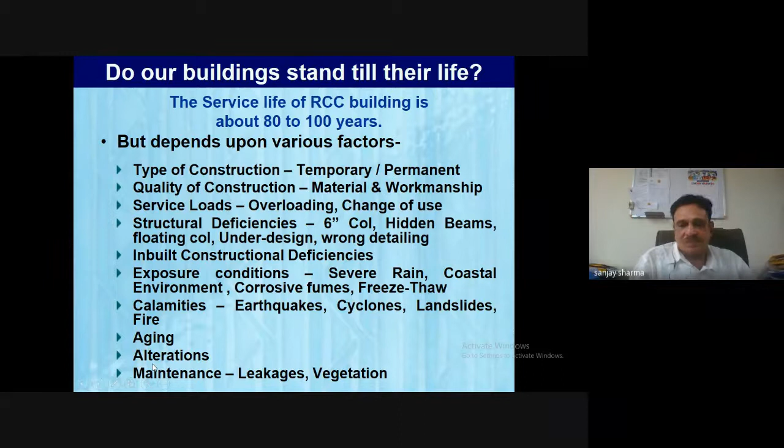So these are the environmental factors, and one of the major reasons for deterioration is the carbon dioxide gas. The corrosion you find in any structure, which ultimately leads to spalling of the cover concrete and loss of strength and loss of area of the reinforcing bar, is due to this carbon dioxide or oxygen ingress.

What happens generally is a phenomenon known as carbonation. This carbon dioxide gas gets mixed with water, and because of the permeability, it penetrates from the atmosphere into your concrete.

As such, carbonation is not a problem to the concrete, but what it does is reduce its pH value. The pH value of concrete, being an alkaline material, is almost near 13, and once it starts reducing due to the formation of carbonic acid—which occurs due to the carbon dioxide gas and the water or moisture present—this carbonic acid lowers the pH value.

As that carbonation migrates from the cover and goes deep into the concrete, it reaches the bar level, and on reaching the bar level it will convert ferrous into ferric, which is nothing but rusting. That rusting will cause debonding of the concrete, and rusting, if it further deteriorates, almost completely eats up the bar also, and the concrete loses its strength and ultimately leads to failure.

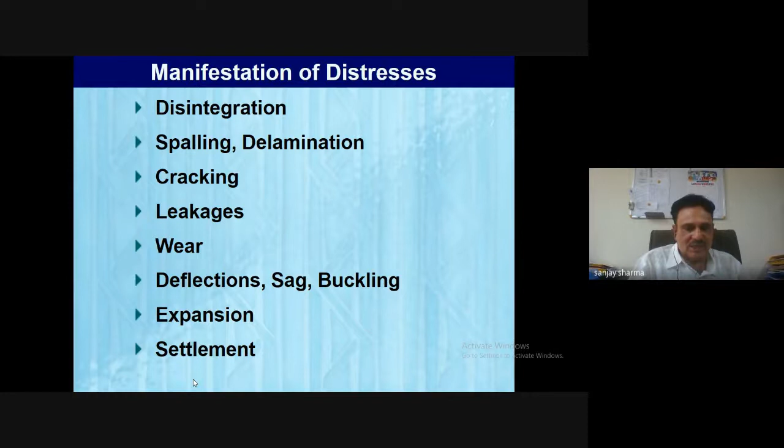We recently carried out investigations on many buildings. A police training center was constructed in Patela, and the building quality was very good, but the issue was that they had not provided proper protection, and during the rainy season water entered into the foundation. Clay being about 1 meter below caused unequal expansion, resulting in lots of cracks in the beams, columns, etc. So we have to think about how to drain out the water.

This shows the importance of investigation and carrying out repairs. Normally, if we are not taking any repair, protection, or investigation measures, the failure cost is very high and occurs much faster. But if we carry out proper repair, proper investigations, and proper preventive measures, we can delay it.

As you understand, cracks can be structural or non-structural. Structural cracks are due to incorrect design, faulty construction, overloading, incorrect detailing, incorrect assessment of bearing capacity, movement or settlement of soil, and corrosion. Non-structural cracks are mainly due to moisture changes, thermal movement, elastic deformations, creep, chemical reaction, foundation movement, and vegetation, etc.

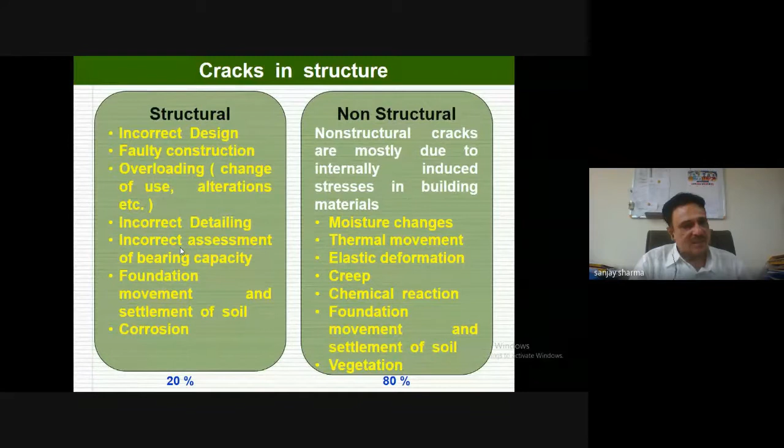That much difference was there, so you can imagine that by understanding the proper type of defects and selecting the right type of NDT test, we can use this approach effectively. We need to understand what type of cracks are there in the slab or any structure, and try to understand whether they are shear cracks, cracks due to deflection, or flexural cracks. Only then can you decide properly what type of testing is okay.

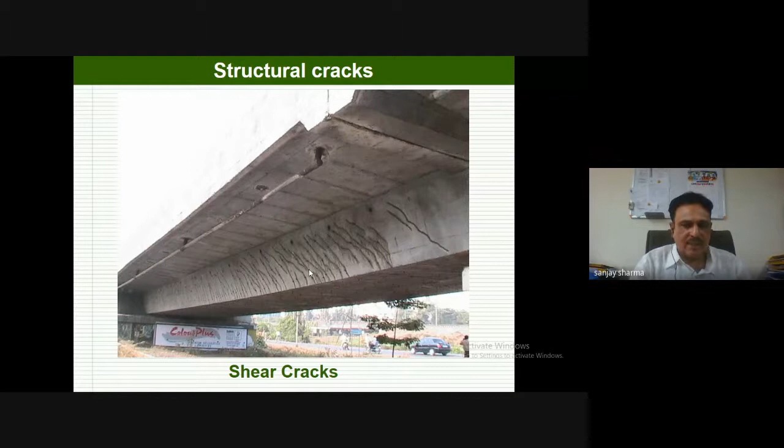If you go to a site and diagonal cracks are there like this, then basically they are shear cracks. So through visual inspection, we try to understand what is the type of defect, so that we are able to decide later on what tests are to be conducted there.

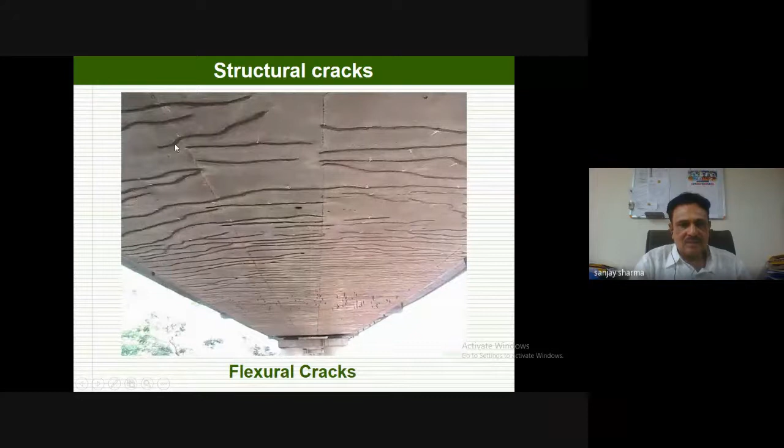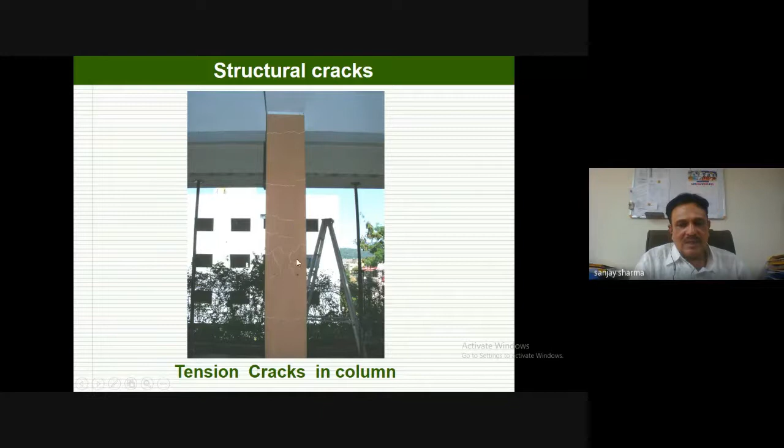This is a flexural failure also. This is again a flexure crack in a slab, a flexure crack in a beam, a flexure crack here, and you can see this flexure crack in a column. This is a tension crack type of thing. So I think you should try to understand the pattern of the crack, and by seeing that pattern, you should be able to tell what is the reason behind that defect.

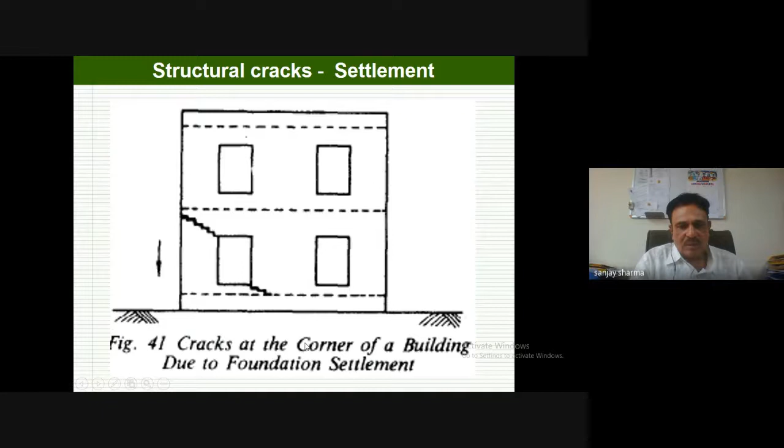You repair to any extent, but generally what they do is whenever a crack appears, they fill it up with cement without bothering whether it will reappear after some time. If not here, it will reappear here or somewhere else. So we need to remove the cause of this settlement. If water is entering, we need to stop the water, or if foundation bearing capacity is not proper, we need to improve the bearing capacity by grouting etc. We need to understand the issue and take proper measures. These are all the patterns of settlement cracks.

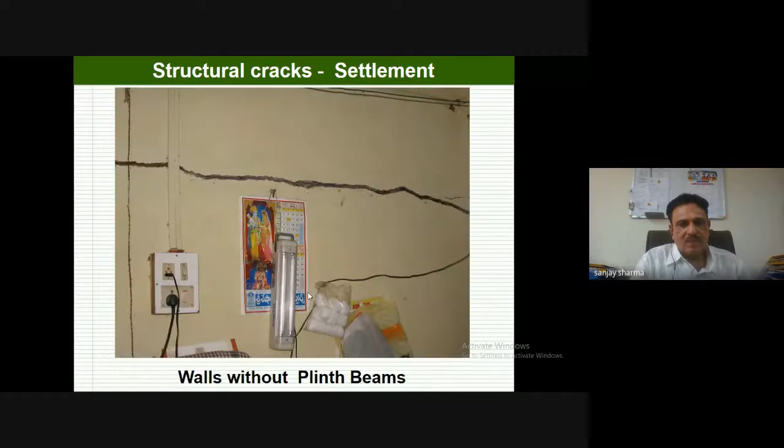This is the wall without plinth beams. This is again the external ground settling down. This particular ground is settling down, and a big gap has appeared between this plinth protection and the building foundation. Water enters here also. This is what you can say is external ground settlement. Complete settlement has taken place, and cracks will appear whatever the structure may be.

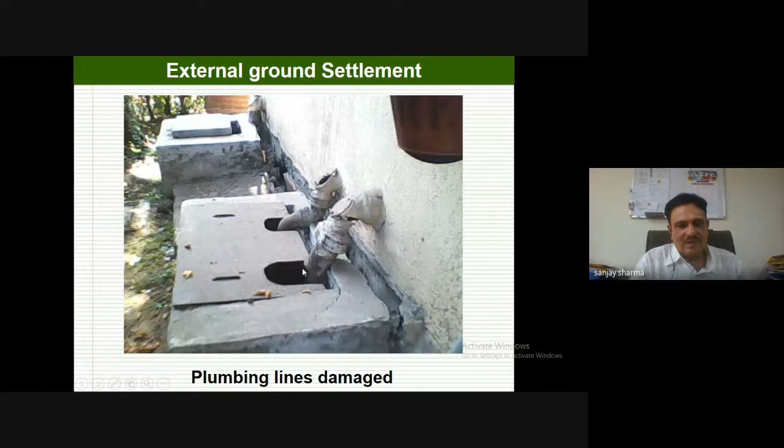This is plumbing line damage. Again, in one of the buildings, what we found is that the traps which were provided at the bottom had settled down. All the plumbing was settling down. So from there we could understand that there is a foundation settlement in that particular building.

Corrosion is one of the bigger phenomena, and it occurs due to two reasons. One I have already explained is carbonation, and the other is chloride. The difference between carbonation and chloride corrosion is that carbonation corrosion cracks will appear along the bar and grow parallel to that bar. Whereas in this case, you can see corrosion has occurred and spalling has taken place, with the crack appearing along the bar.

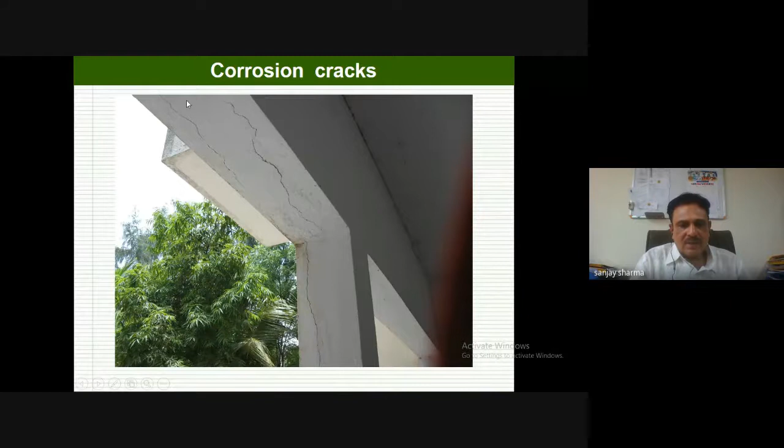This is what you can see, the bar is going here, and the crack is going along the bar. Again, this particular spalling has taken place along these bars.

But in the case of corrosion due to chlorides, what happens is chlorides are already there inside the concrete. This lowers the pH value, and when it reaches the bar, there will not be any sort of crack appearing on the surface, and the failure will be sudden. Because when debonding takes place between the cover concrete and the reinforcing bar, the cover concrete will fall out immediately. There will be small corrosion spots on the surface, but otherwise you will not see anything wrong. So basically, corrosion due to chloride is sudden.

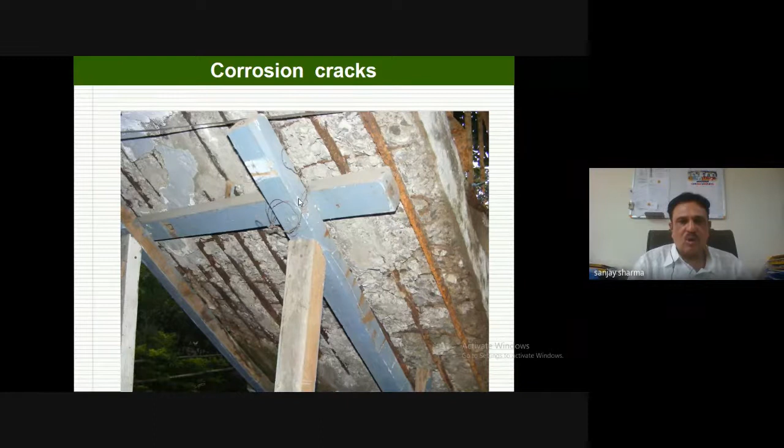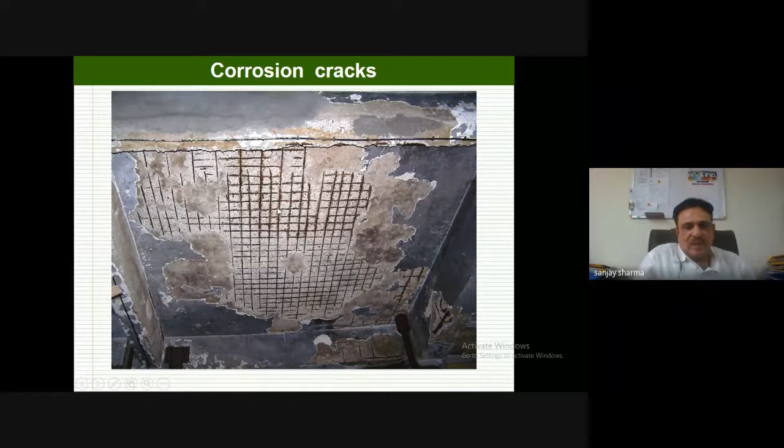As you can see, this is corrosion due to chloride. The whole slab cover concrete has come down, and the area of the section has almost reduced to zero. So we need to know the extent of corrosion, and for that we have corrosion tests available - the corrosion meter, resistivity meter, and other corrosion tests. With the help of this corrosion analysis, you can find out the extent of corrosion, whether the bars have reduced by almost 100%, 50%, or 30%. With the values obtained from the corrosion test, we can determine this.

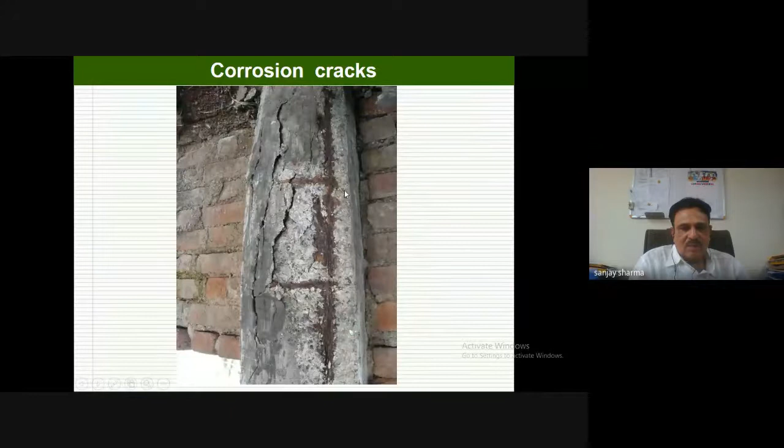This is again corrosion cracks, very bad - almost complete loss of strength in the bar area. You can see how the section has got affected, particularly at the bottom. This is an abandoned building, very badly affected, so it has collapsed. This again shows corrosion along the bar.

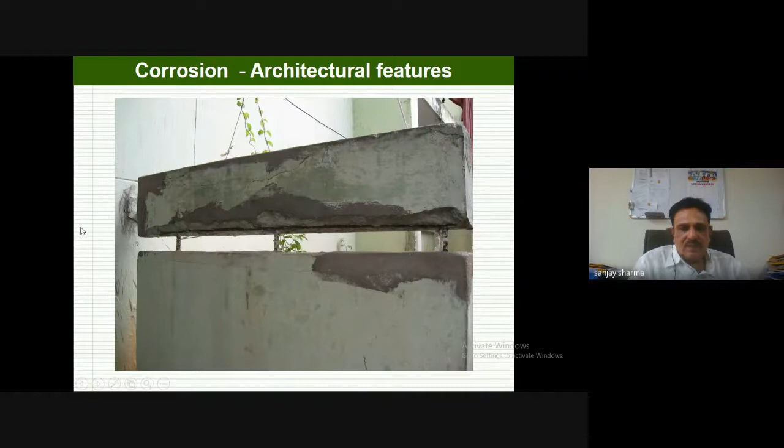Thin members, basically non-structural members, are generally made of M20 grade concrete. If you could make the concrete almost impermeable, the ingress of moisture would not occur, but that is not possible. That is why sometimes we are using a lot of these coatings nowadays - special coatings which we call anti-corrosive coatings.

Anti-corrosive, anti-carbonation coatings. If you provide them on the surface, they do not allow moisture and carbon dioxide to enter and protect your concrete surface.

When deciding this issue, we need to understand to what extent this carbonation has taken place. We take a core, and if it has not reached up to the cover level, we can provide coating on the surface. But if it has reached the cover level, then the repair will be different. That is why investigation plays a very important role in deciding the repair and rehabilitation of the structure.

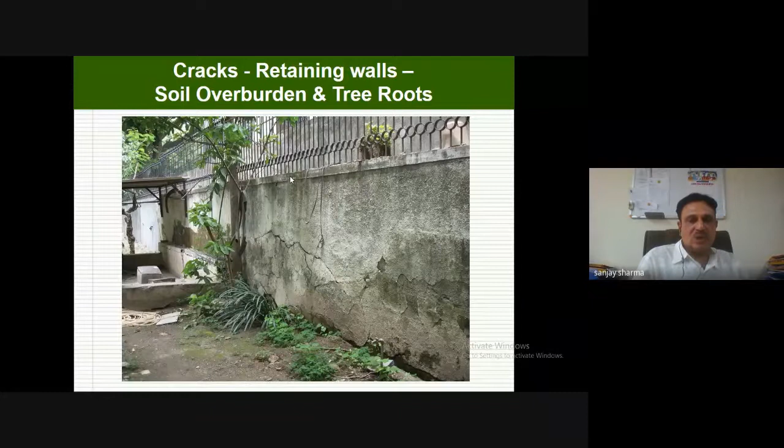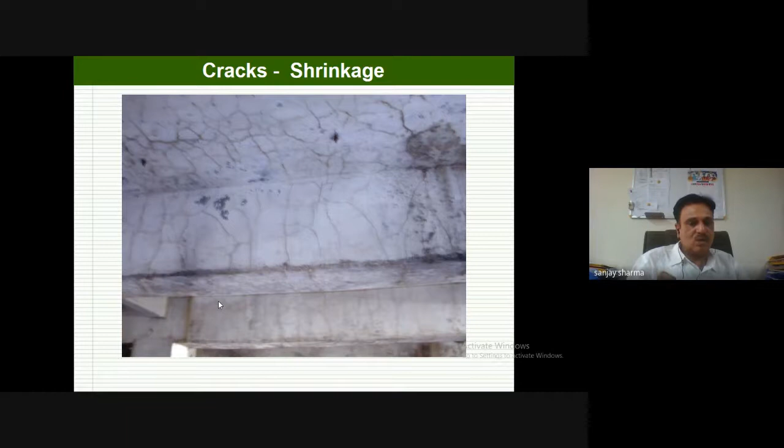Whenever anybody comes to us with a problem, we say visual inspection is very important first. Visual inspection is always a part of NDT technique, and here you need to know this is a ground level water tank.

Again, you can see complete tone change. This is again due to chloride, because there were a lot of chlorides in the water, and basically it caused this sort of problem in the structure.

Almost gone. This is the sulfate attack, particularly in locations like Punjab, Bathinda area. Ground salts are present there, causing a lot of problems.

I have seen almost newly constructed buildings where people are not taking the special precautions needed. The sand they are using also contains a lot of deleterious material, including chlorides and sulfates, and once this enters, many important structures, even military structures in areas like Ganganagar and other belts, have been affected by this corrosion.

This is one of the tanks we tested. I think you can very well imagine the construction quality from this example. There were two water tanks, Intze type overhead tanks, constructed in the same year by the same contractor using the same material.

One tank was standing in absolutely very good condition. The other tank had deteriorated very badly, as you are seeing here. Once they wanted this investigated, we used NDT techniques including rebound hammer, ultrasonic pulse velocity, and carbonation testing on that particular structure.

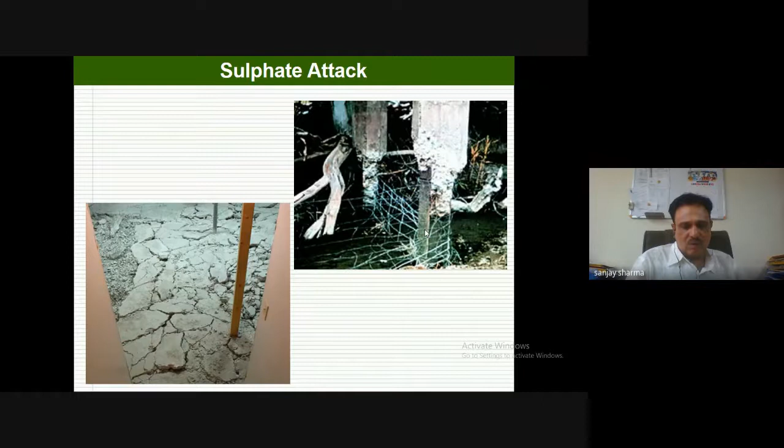This is the sulphate attack again, showing how this is eating into the concrete.

Alkali aggregate reaction: if the aggregates have deleterious material and we have not used the proper mix, this type of cracks will appear. Again, the pattern of the crack is telling you what is the cause behind this particular problem.

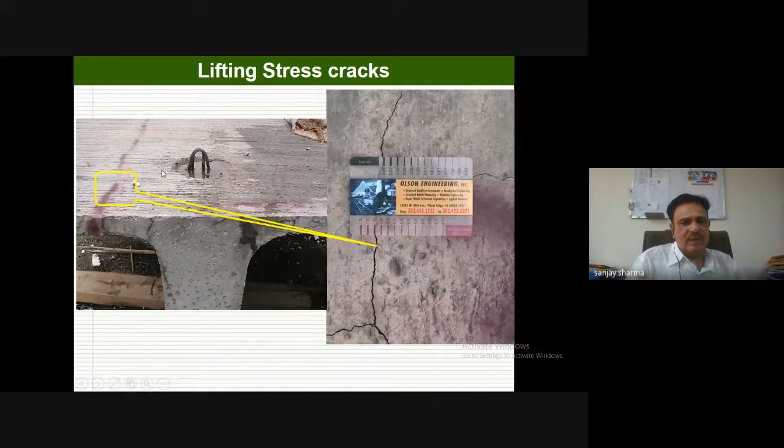Here you can see lifting stress cracks. Basically, during the lifting of that particular precast member, this particular area was affected.

This is again, I think, one of the very major issues. Generally, we don't remove the peepal tree because of our religious sentiments, and you can see these trees grow their roots inside, causing the concrete to disintegrate. Then penetration of moisture takes place, and that is what happens. You also need to see proper maintenance of the roofs.

One of the structures in Chandigarh was a very important training institute where we tested and found big workshops. There, folded plate type roofs were provided. In folded plate type, you have the angular section, then a channel is there.

What happened in that particular folded plate roof structure was that it was mainly workshops, and they were not removing leaves because the height was too much - it was an extraordinarily high workshop building, and there were lots of trees along that building. So all the leaves used to collect on the channel of that folded plate roof, and during the rain, it used to block the rainwater pipes. Once the rainwater pipe is blocked, water was not draining out and remained stagnant. So any water on the rooftop, due to gravity, will penetrate into the slab.

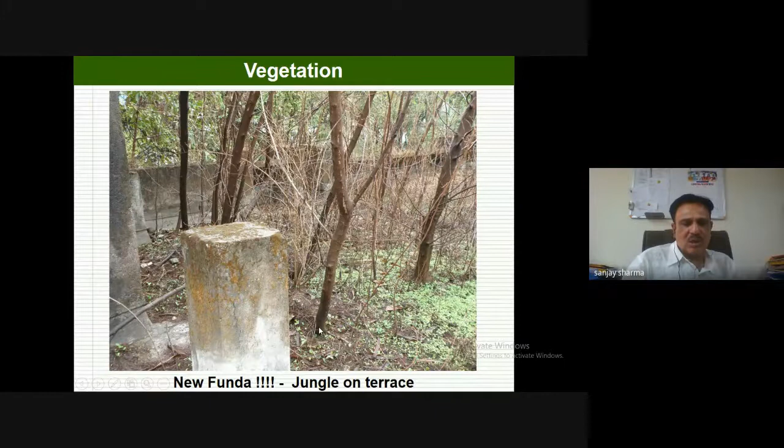So we generally don't take care of that. But once it is allowed, rehabilitation becomes one of the major problems, because it causes loss of strength of structural members, and maybe corrosion also, so all those things need to be investigated.

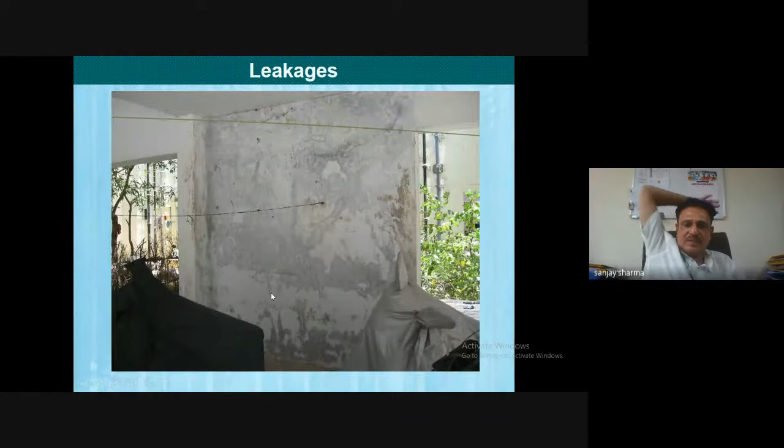These are the leakages. Again, most of the defects in our RC structures are due to the ingress of moisture or leakages from some place. This particular leakage is, I think, responsible for 80% of the problems in our structures due to moisture ingress, as you can see. A very common sight, particularly in wash areas, bathroom areas, toilet areas, is one of the major issues. We need to know what the moisture content is, how much moisture, whether there are still leakages or not - only then can you take remedial measures.

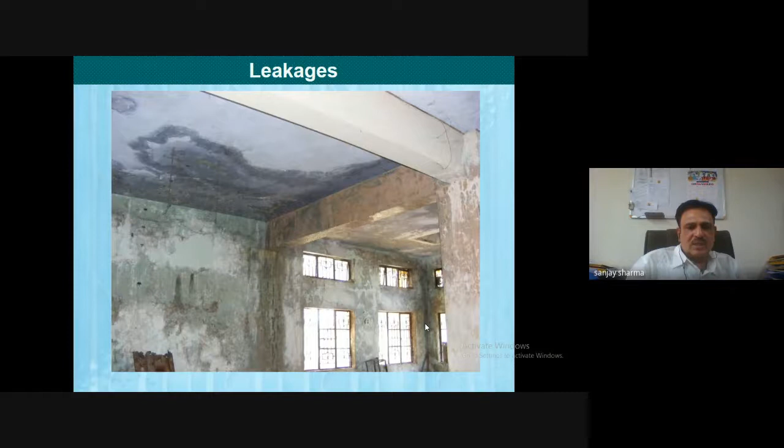If you take any cosmetic remedial measure, it will not be effective at all afterwards. As you can see, this is a very common sight in most structures. If you go to any structure, any place, this is what happens - leakages. This is poor waterproofing.

In our own structures, our houses and other buildings were constructed in the 70s. So when we got into the 2000s and all that, the waterproofing technique here was mud fuska - like bitumen coating on the mother slab, mud fuska, and then tile terracing. These tile terracing joints were there, and because of ants and such, most of the joints got damaged, and water started entering, causing leakage.

So what we did is we thought we'll remove that particular affected portion only, remove even the mud fuska if it's not proper, and relay the tiling. But when it was done, instead of making a very thin joint, we recommended almost a 1 inch joint. We thought we'd fill it with waterproofing cement mortar, and if any problem arose, it would be easy to repair afterwards.

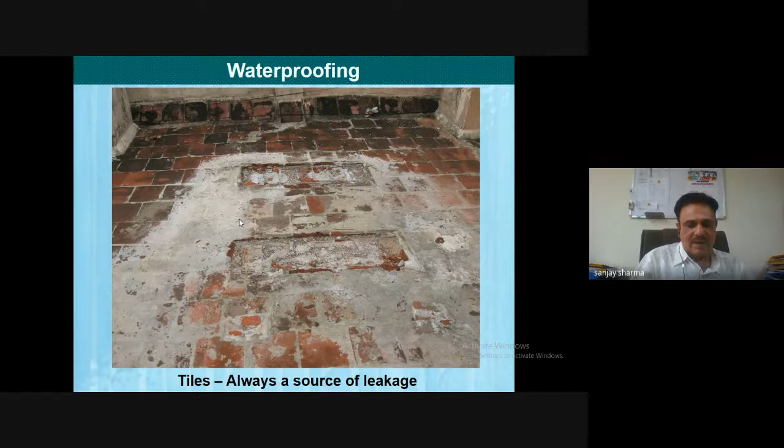That was done in 2000, and now it is 2020 — not a single case of leakage has occurred since. So correctly identifying the problem is very important in any repair or rehabilitation work.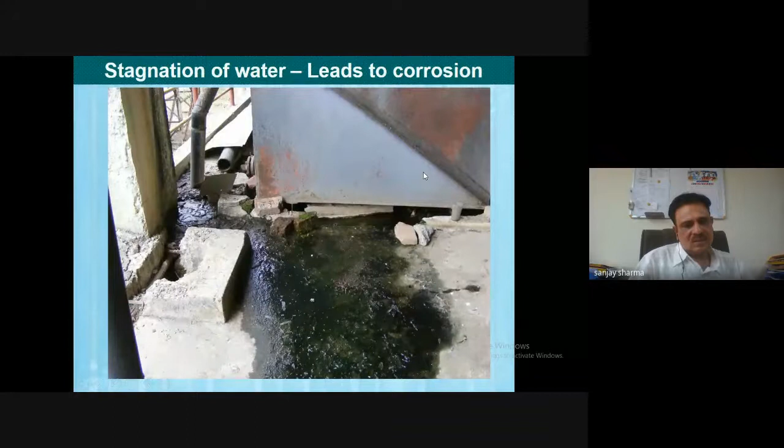This again shows what generally we do — leakage from the tank at the bottom, stagnation of water. Many times, in structural buildings, other causes of distress or cracks may be vibrations from pumps, buildings adjoining rail tracks, buildings near rock mines or blasting areas, close vicinity to unsafe structures, possibility of pounding or joining of buildings during earthquakes. These factors are again one of the major problems.

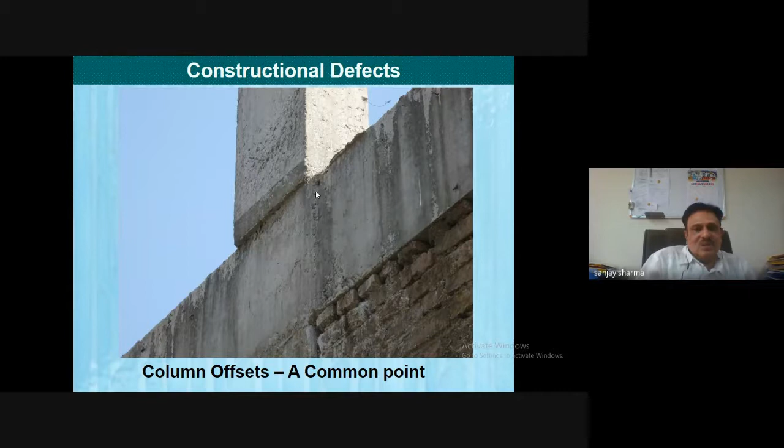This is a type of building we tested — a 12-story building. When the contractor laid the foundation and the plinth beam, he found he had not provided the exact size and distance for it. So he took out the column, provided an offset, bent the reinforcement, and put an offset into the building. When this came to notice, it was clear it had not been done properly, and a lot of issues occurred because of that. This shows generally how the construction was carried out.

This particular case involved almost 12 stories being built, with a dispute over the grade of concrete used. It was whether it should be M20 — because the drawing stated as per IS 456, M20 minimum grade of concrete, but the other specification stated M15 grade of concrete. There was a dispute over this. The whole building was constructed this way, and when we were carrying out our inspection, this issue came to light; otherwise nobody would have noticed it.

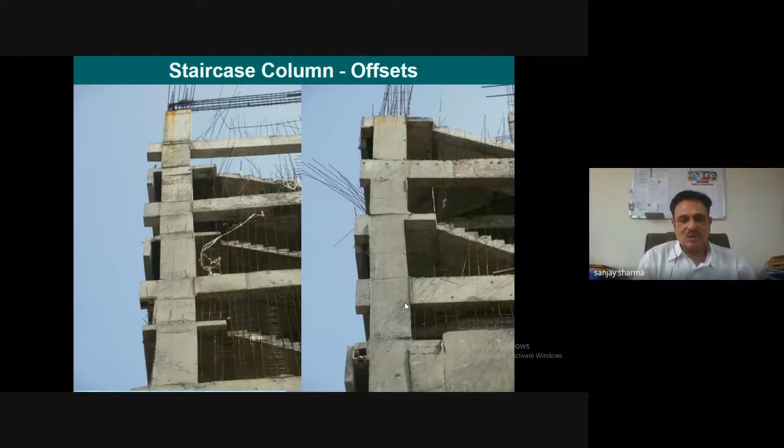So this is how we generally find that construction defects are one of the very common causes of such problems. We can use ultrasonic pulse velocity, the UPV test, to find out the depth and extent of the crack in a particular building.

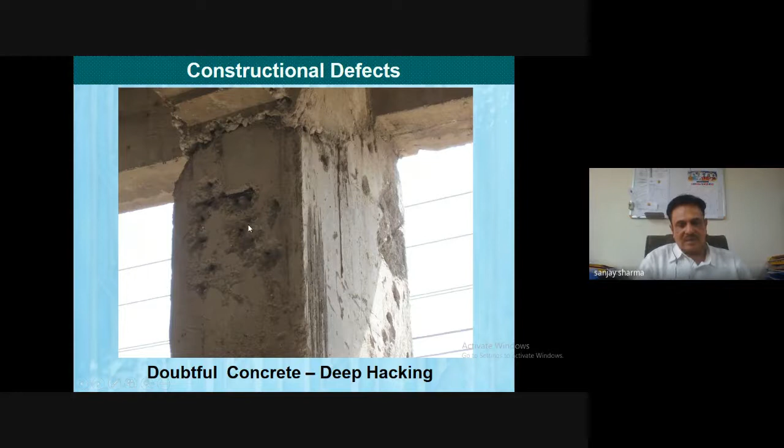You see, cold joint. This is what honeycombed concrete, not properly done. We can find out the quality of the concrete by using ultrasonic pulse velocity test. Leaching of the concrete due to water, and again the porous concrete is there.

Many times, additions or alterations are to be identified at the site by carrying out visual inspection, and we have to see what modifications have been made, if any part has been removed, or if any extension has been done, whether proper rebars or dowels were provided or not.

One of the buildings we also investigated in Chandigarh was a 2-story building, which was otherwise designed as a 7-story structure, but was built as 2-story about 30 years back. Now they didn't have any drawings available, nothing about what bars, type of bars, type of foundations, or grade of concrete were used.

So there also we carried out investigation using a Rebound hammer and then a ferro scanner, by which we found out the number of bars, the dia of the bars, and the cover to concrete. Then core cutting was utilized on the RCC raft foundation, and we took out the depth of the raft.

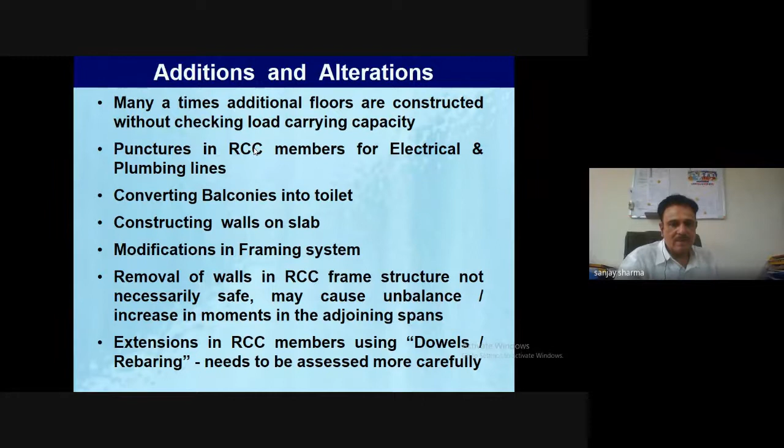So alterations and additions are carried out without proper care. This is a wall that has been added without checking whether it's below the beam, whether it is allowed or not. But yes, they wanted a partition, so a wall was just constructed.

Such cutouts are always made. This is a hole, punching of the RC member for some purpose.

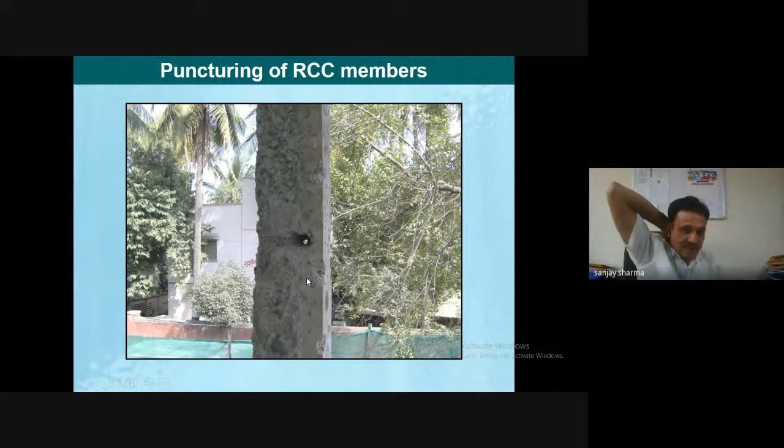One of the structures, a mandi structure in Chandigarh, collapsed because a person who was an artist tried to fix a letterbox on a particular column. It was so weak that while he was hanging something and drilling, it was an outer column, so once it collapsed, the whole building and whole slab collapsed.

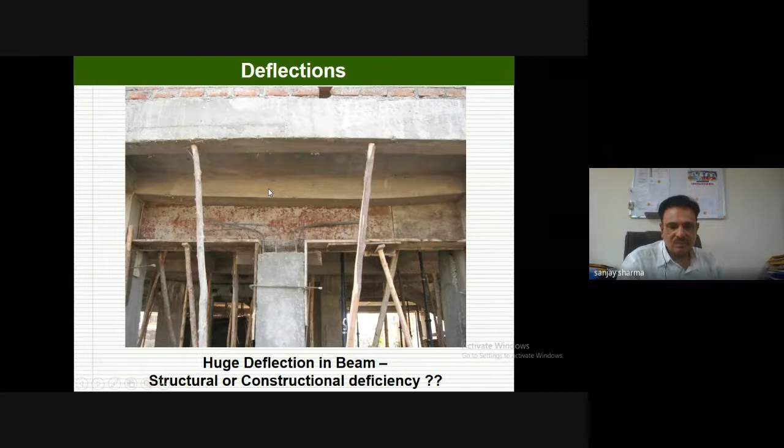That is the example of flat slab I was giving. Flat slabs tend to deflect more if not properly done, properly designed, and that is what causes a lot of this loss.

Then many times, what are the assumptions? We need to see that also. Plaster generally is 12mm, but we go up to 20 or more. External plaster 20, we go up to 50. Ceiling plaster again we provide more. So this all adds extra dead load, and generally it is not accounted for in design, which leads to problems.

Then large span slab ratio. One of the buildings we tested in Leh had a very unique issue. In normal walking there was no problem, but it was a defense building, a seminar hall.

When senior officers were coming, junior officers were giving a salute by hitting the ground, stomping their feet hard on the ground.

The vibrations could be felt by a person sitting on the other end of the court. So they said, okay, let us see what we can do.

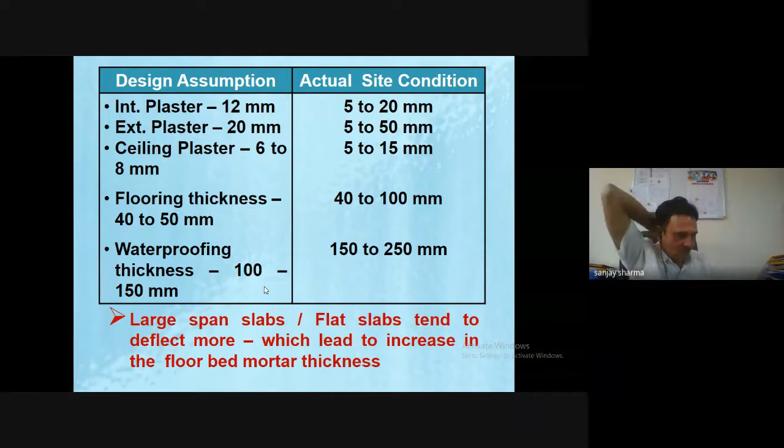So we investigated again, starting with concrete quality and concrete strength, and ultimately what we found was quality and strength were okay. So then we asked them to check the design.

So we checked the design and found out that as per deflection criteria, the slab was failing. The difference was only this: the overall thickness provided was 150 mm, whereas the effective depth was to be 150. So it was not causing any cracks, just a very marginal difference.

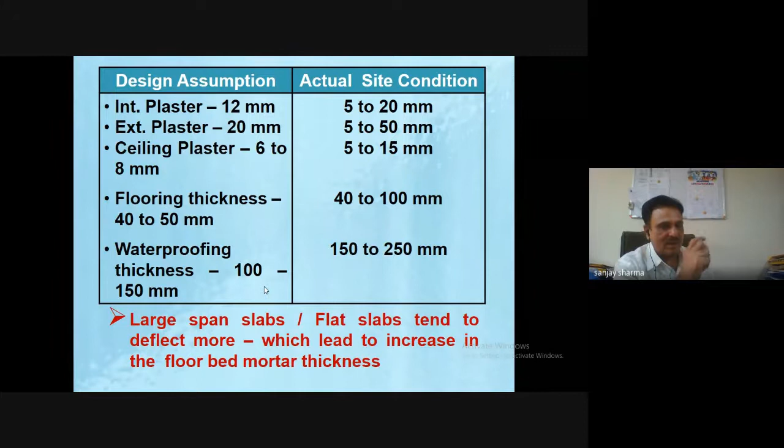So basically moving around was not causing it, but when you were hitting the floor hard, it was setting off the vibration and causing the deflection, etc. This is generally what we do.

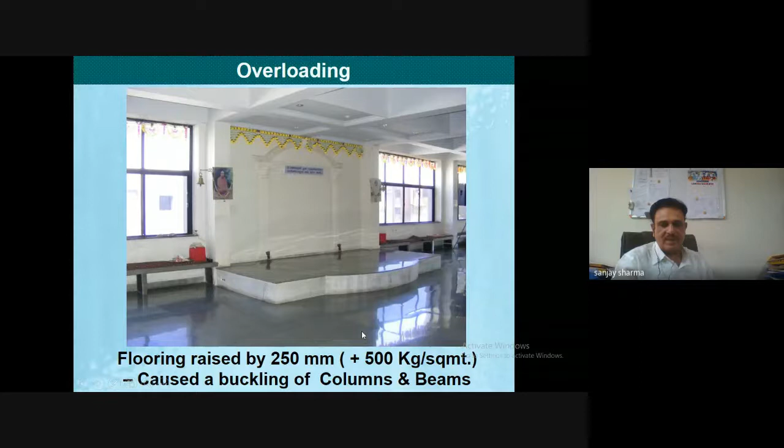Also, if any extra load has been added, we need to be careful while carrying out any condition assessment.

This is again an example, of an IDA building. IDA had this building in Chandigarh, about a 3-4 story building, which was an office building, but they converted it into a storage building.

What they did was put up racks, and on those racks they were storing all the forms and files that they collected. So basically, the building was not designed to take this extra load.

So what happened? It caused the column to collapse. The building wasn't completely damaged, but the column collapsed and so on.

But they carried out the repair without putting any extra reinforcement. They put the load again, and it collapsed again. So then they came to us, we carried out testing, provided the proper design, and then it was rehabilitated.

What we used was the present concrete strength, what reinforcement bars had been provided, and whether some cracks were there or not. Accordingly, it was rehabilitated.

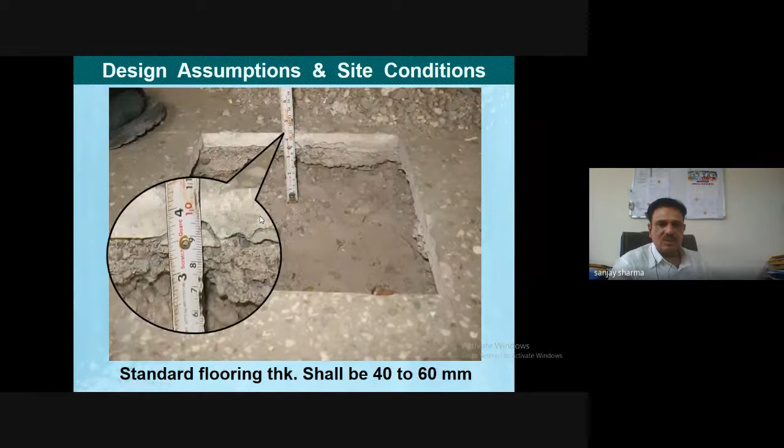This is what overloading looks like. Many times we construct an extra room over the balconies. The standard flooring thickness shall be 40 to 60, but it is very, very high in this case. This is how it happens - structural cracks and structural collapses occur. Sometimes the shape of the building is also not right.

So regarding this, let me give just a little bit of introduction. I will not go into detail on this, but yes, just briefly.

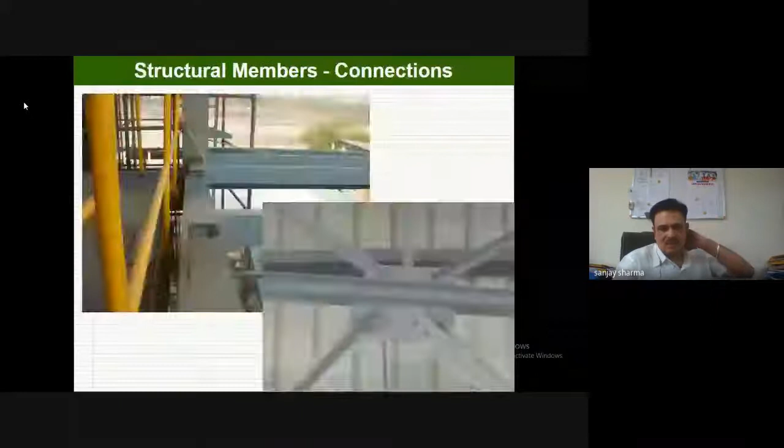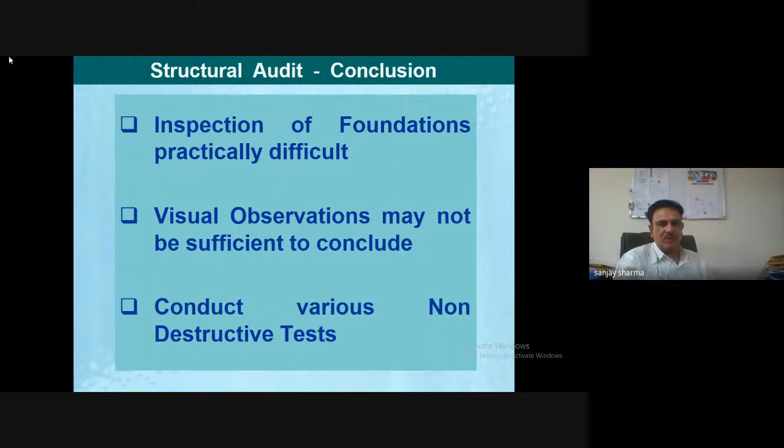Having known this, you can see that these types of structural collapses occur. So basically, we have to carry out visual inspection, and based on that visual inspection, we need to decide and conduct various non-destructive tests.

Why we have to do these tests is, as Harun was telling, sometimes you have to get the structures certified. CBSE, AICTE have made it compulsory to get a certificate of structure stability, and you can only judge the structure stability by using NDT tests.

Sometimes we have to decide whether it requires repairs or strengthening measures or not. We cannot decide this without carrying out the NDT tests. So there are various NDT tests.

They have a wide application, mostly for concrete structures. Generally, you want to know the concrete quality of the member - chloride penetration, carbonation, cement content, etc. - and then assess deterioration. This is done by visual inspection combined with certain tests.

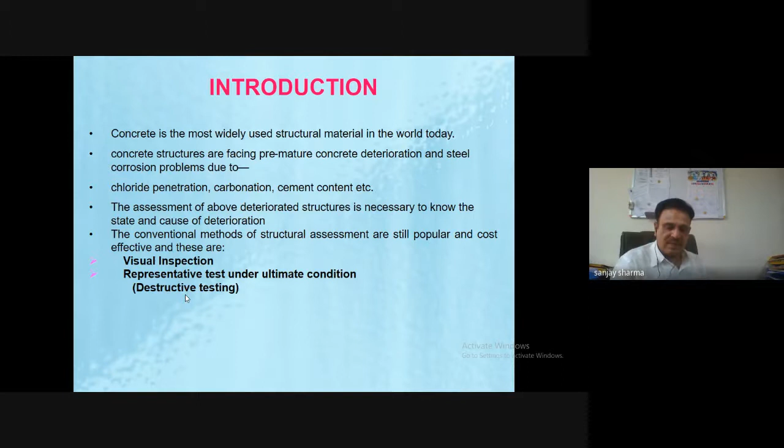We cannot do destructive tests on the whole structure because it will cause damage, and it is also very difficult. What you find with NDT tests is that they are simple, easy to conduct at the site, and at the same time give you a lot of information about the structure. That is why we carry out NDT tests, because conventional methods have their limitations and cannot be used everywhere.

So basically we can do the NDT test on any type of structure, maybe pipeline, bridges, water tanks, power stations, refineries. Both new and old structures can be tested. But you'll find there are so many NDT techniques that a single technique may not be useful.

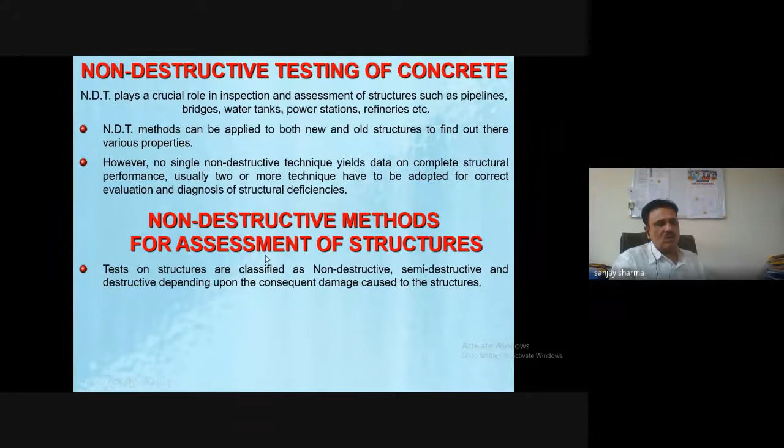So you have to test in many locations. The non-destructive test methods for assessment of structures are basically carried out to know the condition of the particular structure. In investigation, the commonly used tests are the Schmidt rebound hammer and ultrasonic pulse velocity method. These two tests in combination are very commonly used and are good for this.

Then you have to carry out the rebar scanner, used to know the reinforcement details. You can find out cover to reinforcement, which is important in carbonation assessment - where carbonation is present, cover to reinforcement is very important. Then spacing of the reinforcement and diameter of the reinforcement.

And then you can carry out the corrosion test, where you use the resistivity meter and the half cell potential measurement. These are the tests which will tell you the extent of corrosion in any structure.

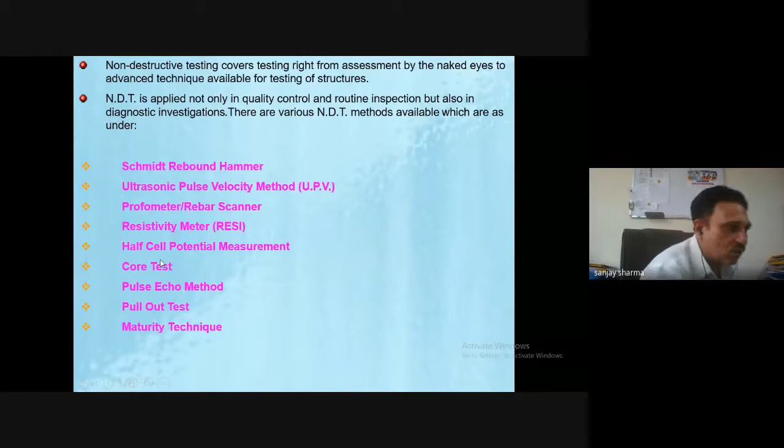Then you can do core testing - not partially NDT, but it does cause damage to the structure. We take cores, but sometimes taking cores from the structure is very important, because if it is an old structure, and for UPV - ultrasonic pulse velocity - if you are to measure the strength, it needs calibration.

This calibration is done by taking cores at a few places, because when you go into detail of rebound hammer and ultrasonic pulse velocity, you'll find these test results depend upon type of cement, type of coarse aggregate, fine aggregate - all these affect your UPV value. So either you use the standard curve provided, or you can have your own curve plotted by taking cores, and then you can predict the particular value very accurately.

We will discuss it in interpretation of results also.

Then the pulse echo test - generally this test is done for piles. Vibrations or echo pulses are sent into the piles, and once they travel down and reflect back, then using the software provided, you can find out the depth - whether the concrete has been cast to full depth, or there is any sort of discontinuity.

The pull-out test is generally used when you have old concrete joined to new concrete - there you can use this pull-out test to find whether the new concrete fails or old concrete fails, and at what particular location.

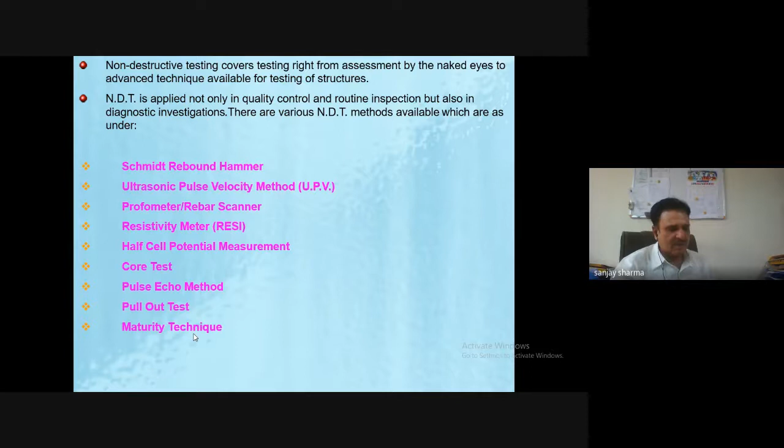The maturity test is more of a quality test, where you put a thermometer inside the concrete at the time of casting and measure the temperature, seeing how much temperature is generated due to the heat of hydration, which has been correlated with strength development.

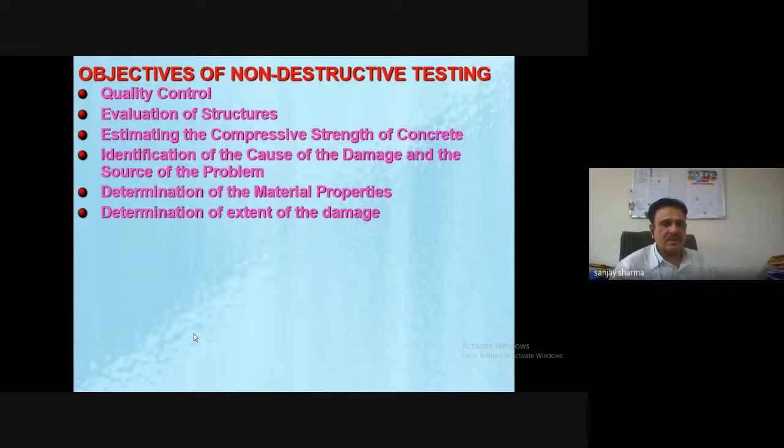So generally, the objectives of non-destructive testing are: quality control, evaluation of structure, estimating compressive strength of concrete, identification of cause of damage and source of problem, determination of material properties, determination of extent of damage, assessment of safety and serviceability of the structure, formulating remedial and preventive measures, determining the position, quantity and condition of reinforcement, estimating cost of repair or replacement, increasing confidence level of few destructive testing techniques, and structure evaluation after repair.

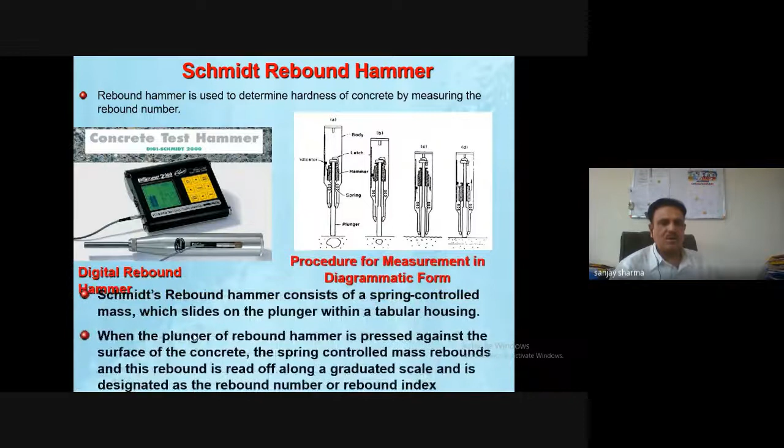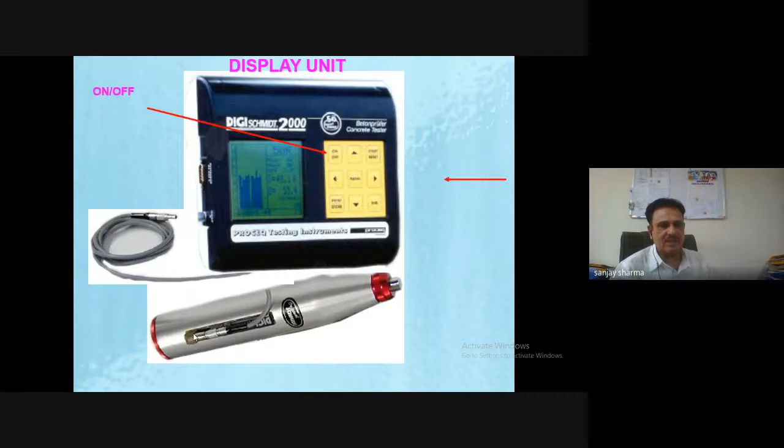I will not go into detail here, but this is the rebound hammer - different types of rebound hammers are available for finding out strength. These will be discussed in the subsequent lecture on NDT techniques. The rebound hammer reading depends upon the impact direction.

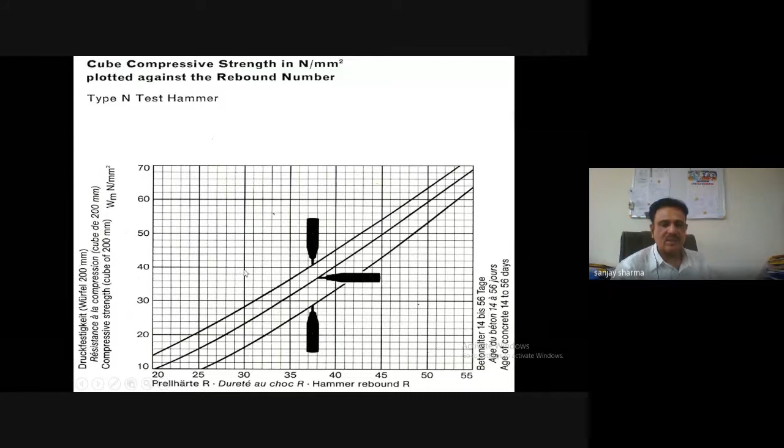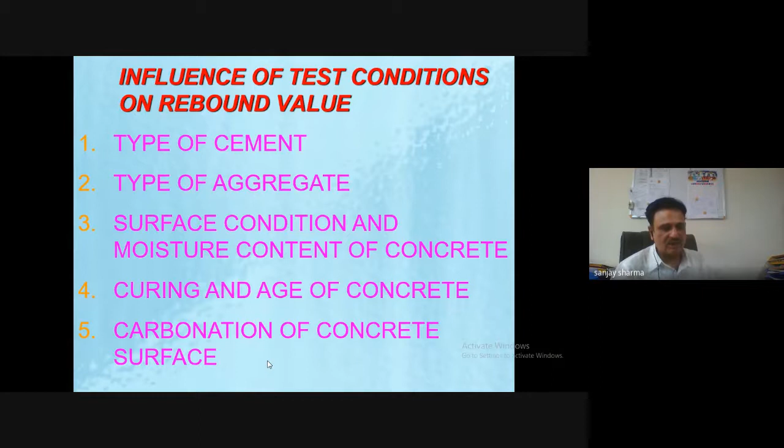There are different types of rebound hammer to be used for normal concrete, mass concrete, or low strength concrete. It depends on type of cement, type of aggregate, surface condition, moisture content, curing, age of concrete, and carbonation. Carbonated concrete gives a very high value of the rebound numbers. But if your rebound hammer is not having that carbonation adjustment, and you are testing on carbonated concrete, you will get a very high strength reading as per the hammer, but the actual strength is lesser than that. So we have to be careful and also carry out a carbonation test.

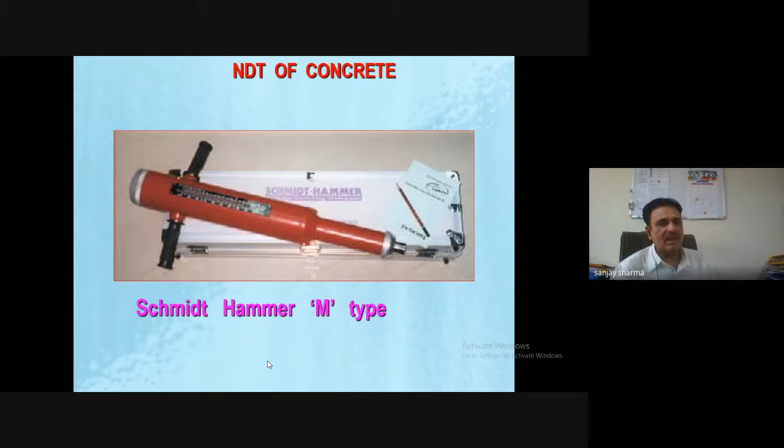This is the N-type hammer being used - this is the non-recording N-type hammer. This is the P-type hammer for low strength concrete, used to find out the strength of plaster. This is the M-type hammer for mass concreting work, like dams or airports, where depth of concrete is very large. These are different types of hammers.

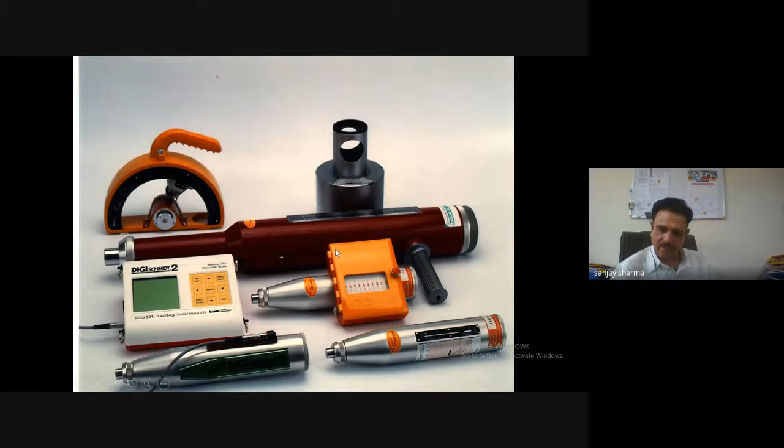This is the anvil, which is used to find out whether your hammer is giving the correct reading or not - there is a standard. Once you hit the plunger of the hammer against this surface, it will tell you the exact reading. So the advantage is it's simple and speedy, but accuracy is a matter of concern - accuracy is plus minus 15 to 25%, and it gives you strength up to a limited depth only.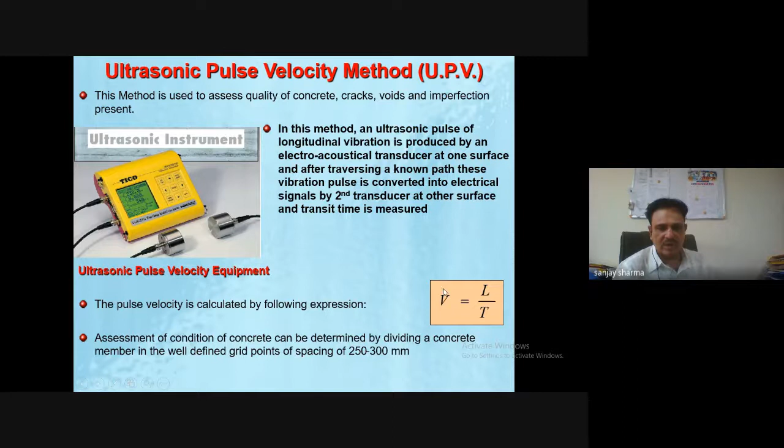Ultrasonic pulse velocity testing: here we have this transducer, one is a receiver, the other is a transmitter, and once you run it, this thing sends waves. These waves travel down, and they cannot travel through a void. So if there is any crack or void in your concrete, it will take a longer time for the wave to travel. So we calculate the velocity, and this velocity has been correlated with the quality of the concrete. Again, a very simple test.

This was code 13311, but now this is all covered in 456 in different parts, and the criteria has been changed. Nowadays, I think they say the UPV value on any concrete should not be less than 3600. If it is less than 3600, you need to carry out further investigation.

I think there are 2 probes, and on concrete you can carry out direct contact testing with that. I'm not going into detail because this is going to be discussed exactly, but I am just introducing the equipment to you.

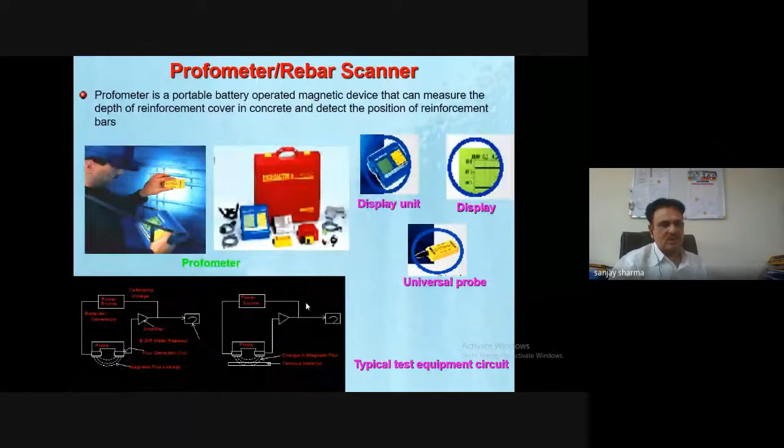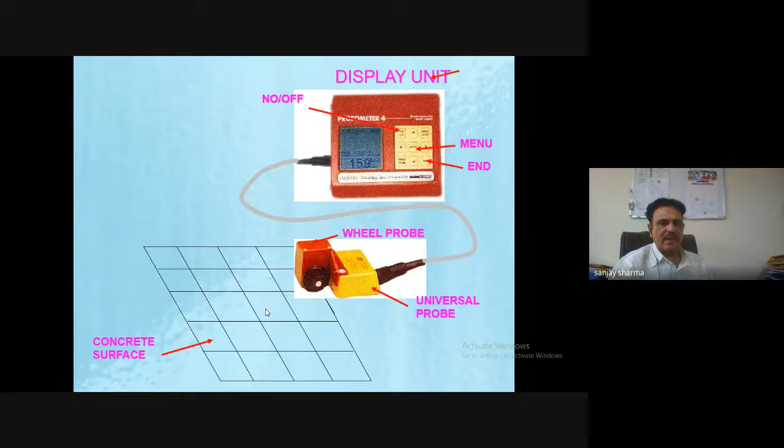This is the Profometer rebar scanner. It is used to locate bars, measure concrete cover, measure bar diameter, and measure the spacing of the bars. Again, a very good instrument - we have used it many times for our purposes, specifically the Hilti one. It has a probe attached to a microprocessor, and once you run it on the surface like this, you will get the readings - all the details like bar cover, reinforcement, etc. can be obtained by this.

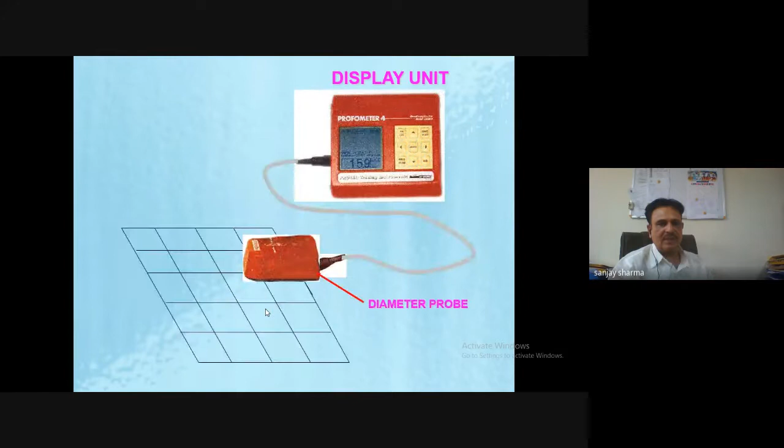This is what you can see - different sorts of units are there. This is for corrosion determination. Corrosion can be determined by using this.

When there is corrosion, you have to use a carbonation test, which is a chemical test, along with either a half cell potentiometer or a corrosion resistivity meter - these 3 things are to be used. Basically the factors - corrosion, pH value, moisture, oxygen permeability, water permeability, dissolved chlorides, permeability of the concrete, cover to reinforcement, etc. - are important in corrosion, and we have to find out all these factors while carrying out a corrosion investigation.

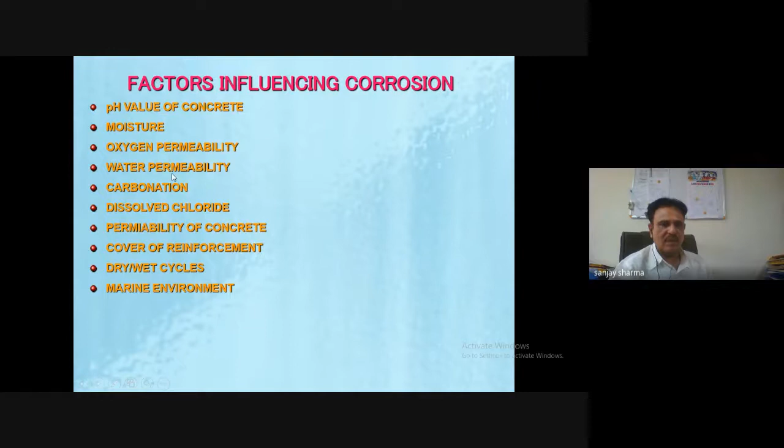This is the resistivity meter, which measures the resistance of the concrete, and there is a standard table. Once you read the readings against that standard table, you will be able to find out to what extent corrosion has taken place. This is a half cell potentiometer.

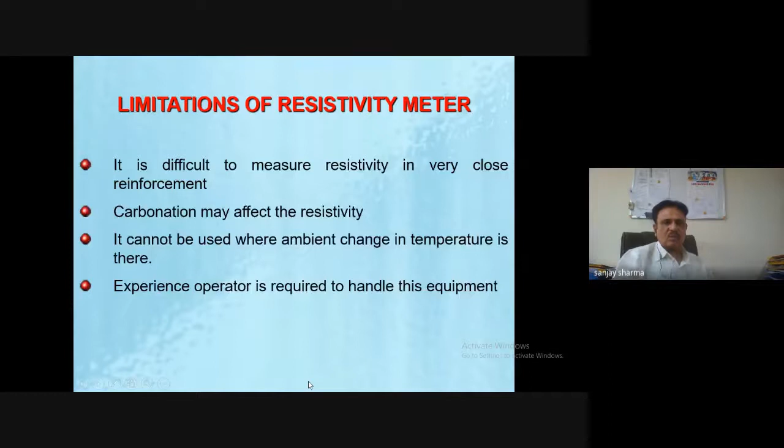Again, we pass a current, and with the help of the current we determine the voltage. That voltage has been correlated with the corrosion of the concrete. I'm not going into detail about how to conduct the test - I'm just introducing you to this thing.

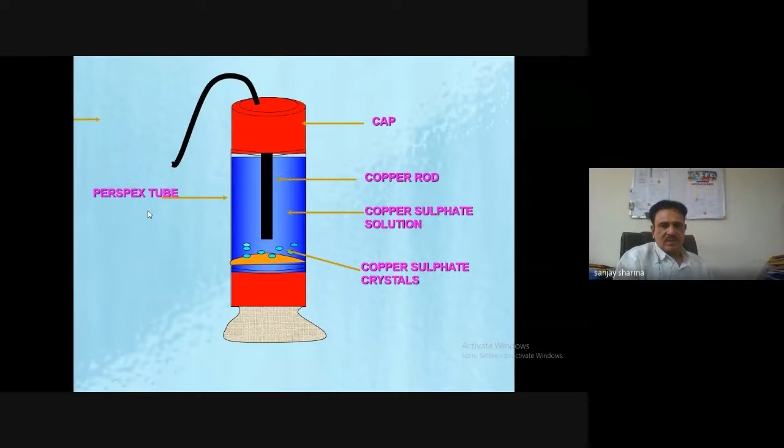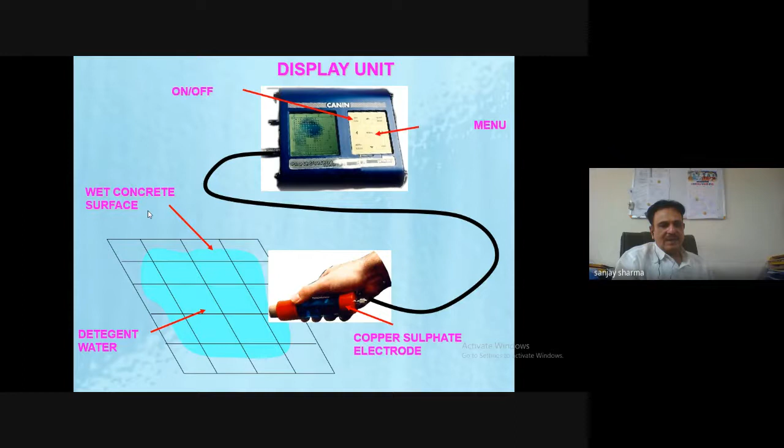The voltage reading tells you the extent of corrosion. More negative than minus 350 indicates greater than 90% probability, and a positive value between this range means no corrosion is present. This is how you can decide about different things.

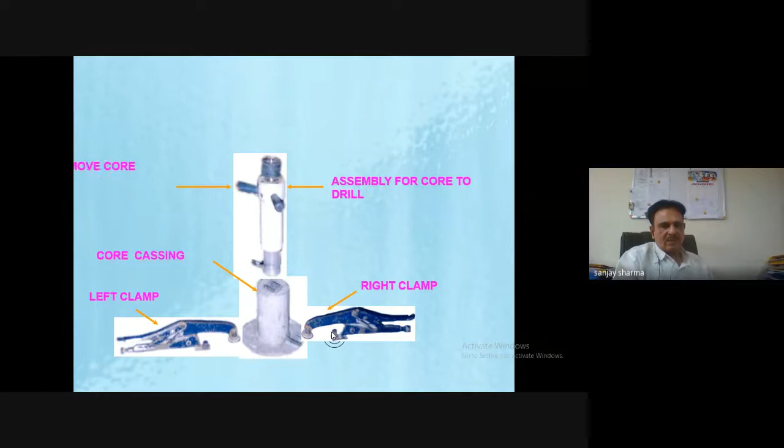Then you can do core testing. Core testing is not purely destructive, but it gives you a lot of idea about the condition of the structure.

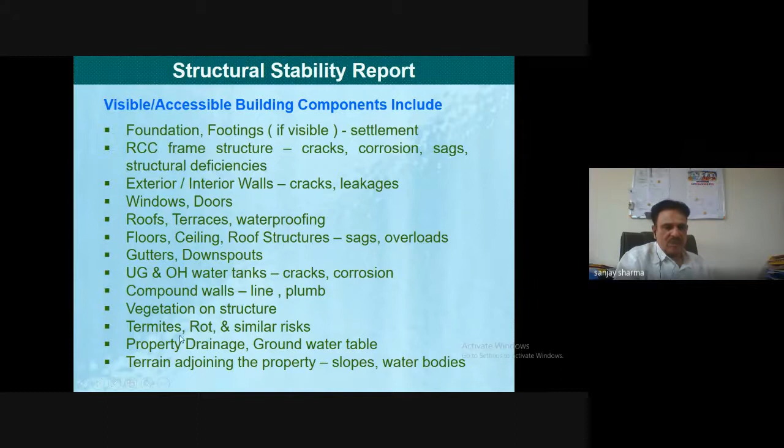You can prepare a structure stability report after carrying out the building inspection, covering the overall condition of the building, significant defects found, and urgent repairs required. This includes foundation defects, frame structure defects, defects in walls, windows, doors, roofs, terraces, floors, overhead tanks, underground tanks, vegetation, termites, property drainage, and terrain conditions.

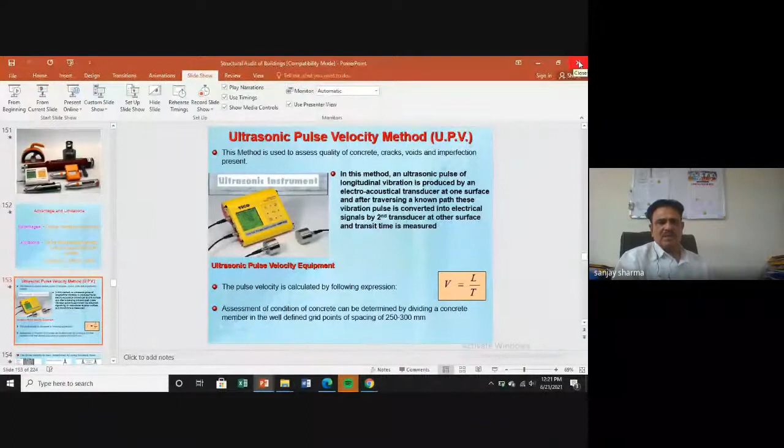All these will tell you the extent of corrosion, and there are certain other equipment which I have not discussed in this presentation. Maybe if time permits on the final day, we will take up these things also and discuss what type of structure and what type of testing applies.

We can conclude here that knowing the type of defect and knowing the cause of deterioration is important, and to find these parameters we need investigations using NDT techniques. I have shown you the very basic, commonly used ones, but there are advanced techniques too. Most of those will be discussed in detail in the coming presentations, since the program is purely on NDT and non-destructive testing techniques.